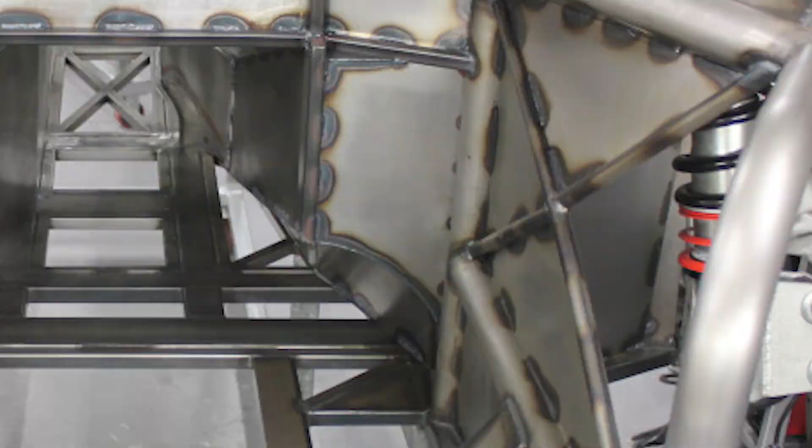Yo, on this episode of KPOPRC, we build the Zero Flux Hilux.

Oh man, it's legendary. I turned myself into a pickle, Morty!

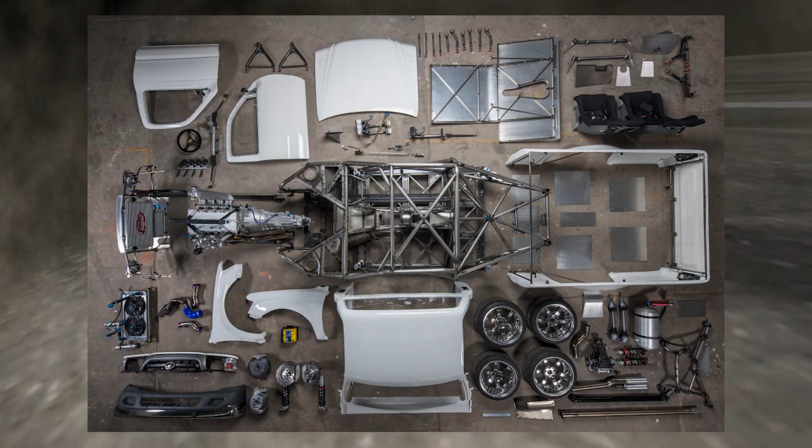And today, we're gonna kick it off with Engineered to Slide's Yota, the KPOPRC Zero Flux Hilux.

That's a knife. I see you've played knifey spoony before. What's going on? I'm just waiting for a mate.

Massive sources of inspiration don't usually come around often, so when they do, you drink as much of that inspiration as you can. One lowly afternoon, I stumbled upon Engineered to Slide. Hailing from Warrnambool, Australia, Nigel, the owner-operator of Engineered to Slide, creates his masterpieces.

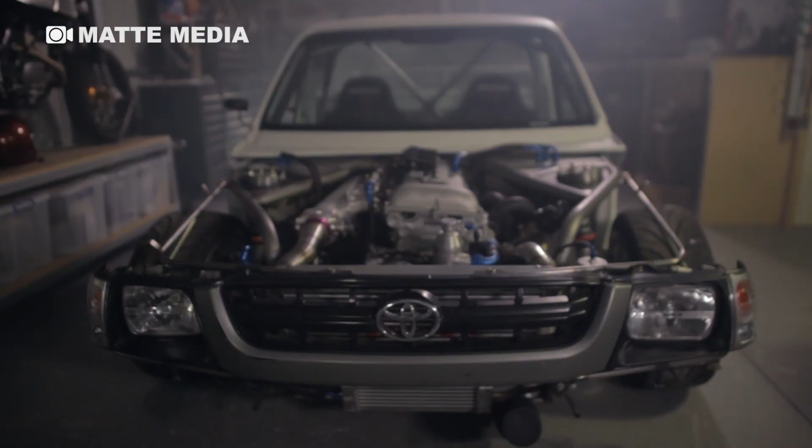The one that caught my eye was his fully tubed drift Hilux. Look at this beauty, I'm a huge sucker for tubed cage design. Look at this gantry of metal under the thin sheets of Hilux bodywork. Just look at it, just look at this beauty.

After going down a Google pit, I started to realize Nigel's manifesto is everything I aspire to be.

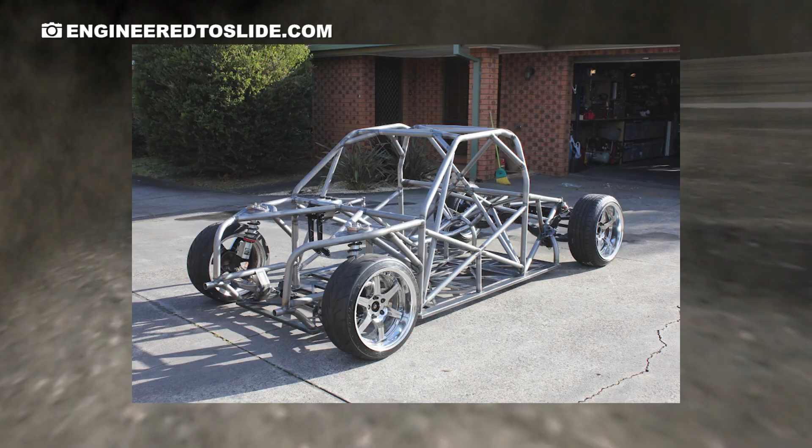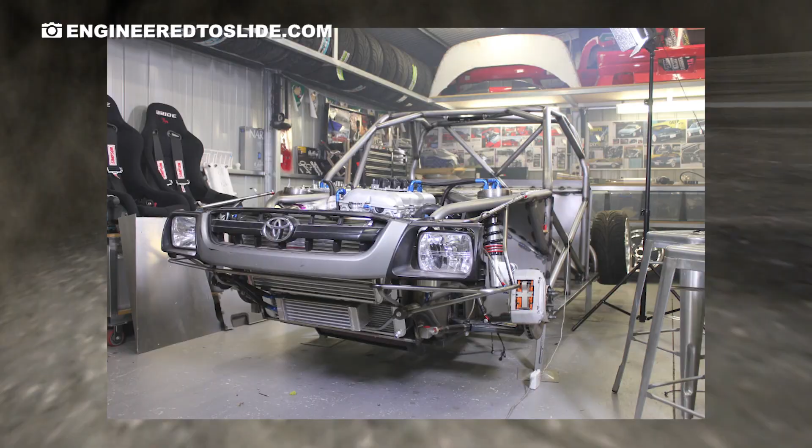100% ground-up tube chassis. Every component was meticulously over-engineered by Nigel. The beautiful cage was freehand designed with no plans. Every body panel removable, powder coated, clear coated, absolute labor of love. Of course, I had to have one.

I had to make one. Where do I begin?

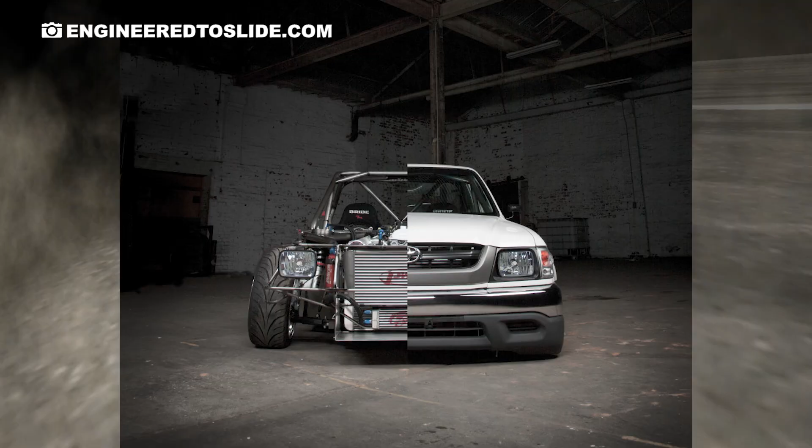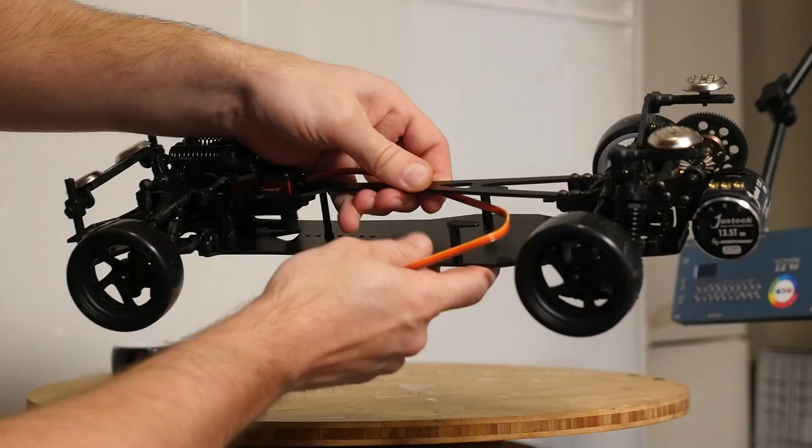The Sakura D5 is the obvious platform of choice when building experimental drift RCs. Why, you ask? Because it doesn't break the bank. A Sakura D5 chassis will run you just over $100, and now due to its popularity with RC drifters, most aftermarket companies are starting to pump out massive amounts of hop-up parts for it specifically.

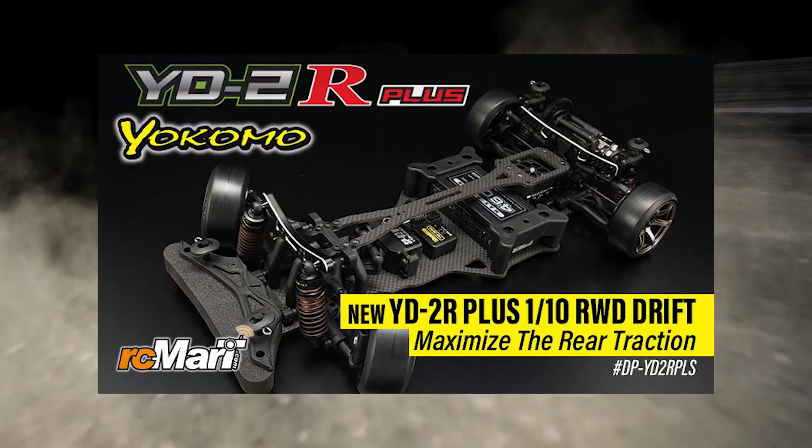Not to mention Sakura investing much more money into its first rear-wheel drive specific chassis. I bet they'll end up the way of the YD2 with more versions of the same chassis with subtle changes and baffling naming nomenclatures.

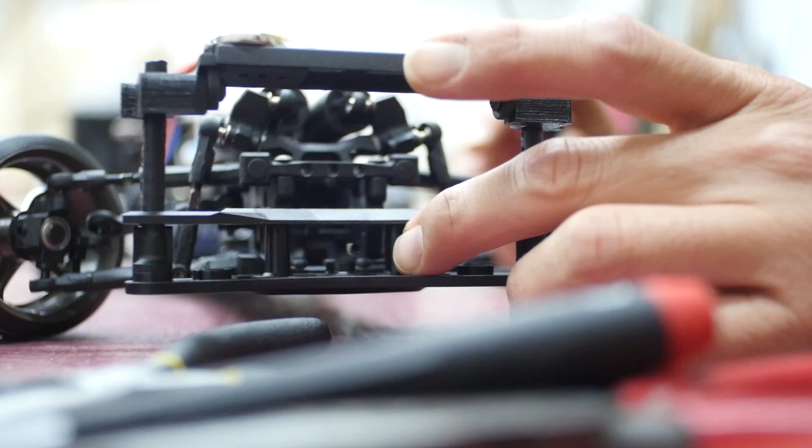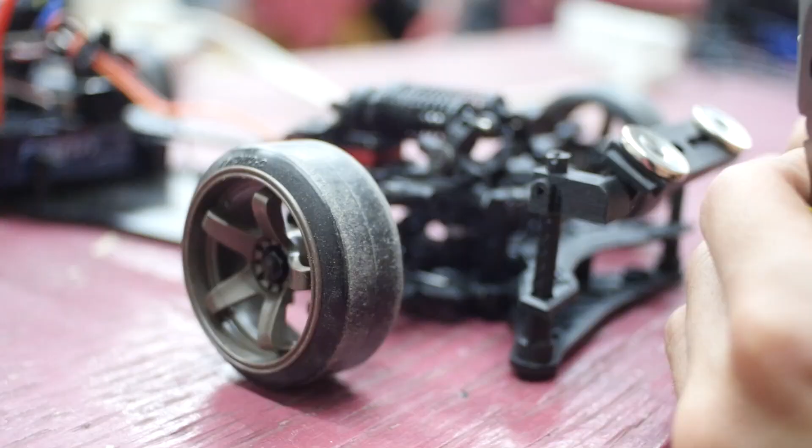Is it the best RC drift chassis? God no. But is it capable? Fuck yes it is, and with a group of experienced drifters at the track willing to help you test and tune your chassis, you'll get that D5 ripping and even tandeming with some of the most expensive RC drift chassis out there. But back to customization, you won't regret cutting a D5 chassis in half to make a wild project, because it only cost you $100.

So we got our chassis, that's the easy part. Now it's time to figure out how to KPOPRC the shit out of this build.

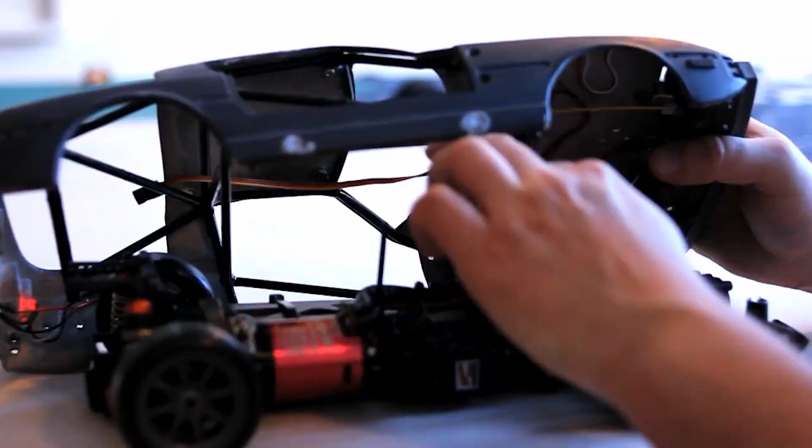I always like to build elaborate cages that attach to my chassis for all my builds. The first build, it was a copper cage on an old RX-7 toy I had as a kid for the Scale as Shit project. Then I evolved to the styrene with Adam LZ's cream color 240. It had winkable flip-up lights and a pretty sweet backfire kit.

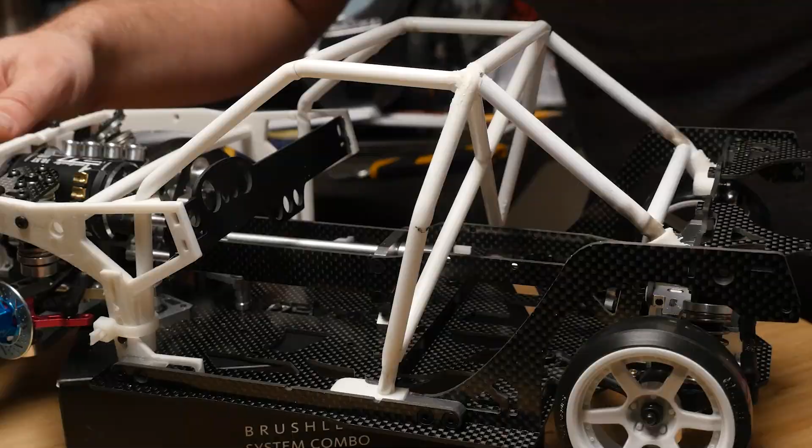Then I really went nuts, with the E30 wagon cage, with the KPOPRC bus, a network of wires allowing me to tap into any radio channel or light controller wire anywhere on the chassis.

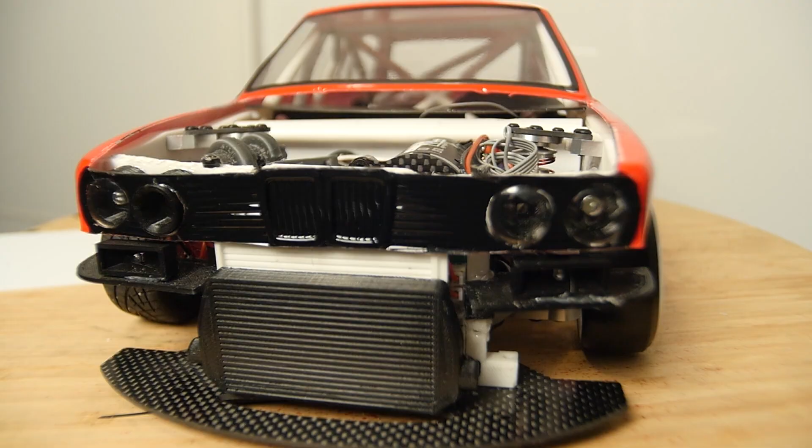The E30 is a slightly abandoned project because I did realize the Bulldog chassis is such a freaking dog. So now, what do? How do we make the Hilux build top them all?

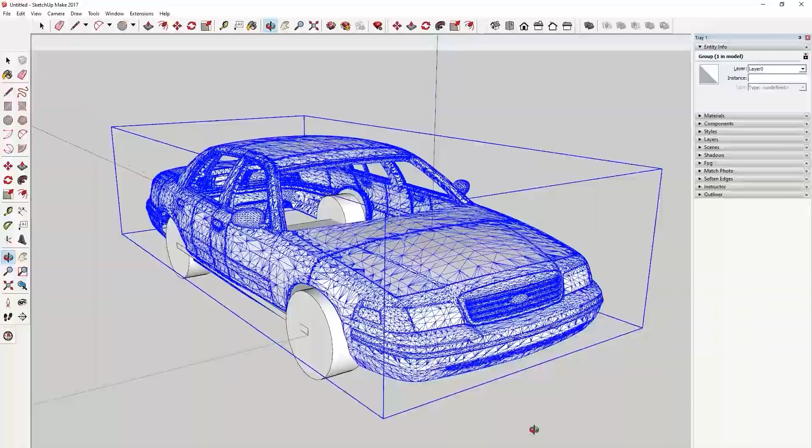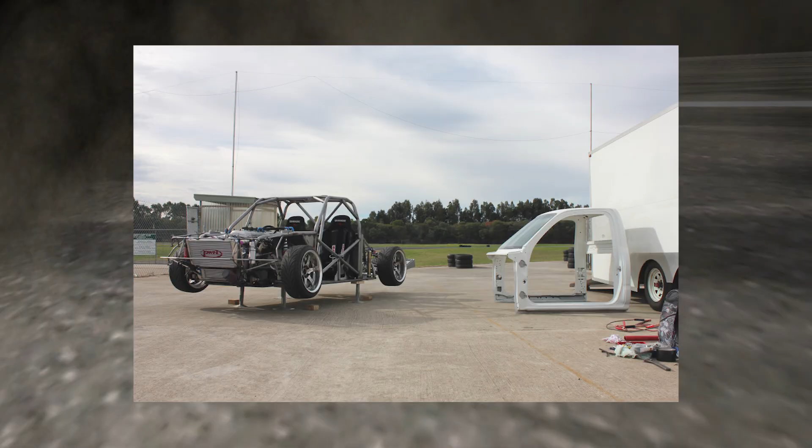How about we team up with another RC fabricator and share skills to make the ultimate 3D printable design for this chassis? Just gonna send it! Keeping within, of course, the spirit of the Engineered to Slide drift Hilux. Truly a Zero Flux Hilux.

Did you expect anything less? I can feel it all the way down in my plums. On your mark, get set. We're riding on the internet. The internet! A cesspool of misinformation and cute puppies!

Among the incredibly depressing drab and cuteness, sometimes you do stumble on some value in between those zeros and ones. That value is an amazing community of like-minded model makers who never really want to grow up. Those are my people. There are quite a few, and I'm very lucky to befriend the best of them.

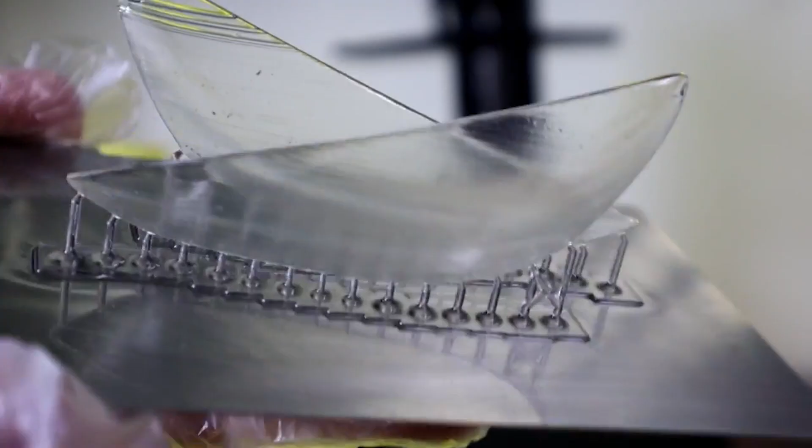One of those hobbyists is Ali from Scale Addiction. Who better than Scale Addiction to help model the Zero Flux Hilux? Scale Addiction, the master of 3D design, pumping out scale replicas of some of the coolest cars on his YouTube channel. We connected through the internet a while back, sharing photos of projects we were working on, and finally, now we are collaborating on this amazing project.

Oh, hold on, you're breaking out.

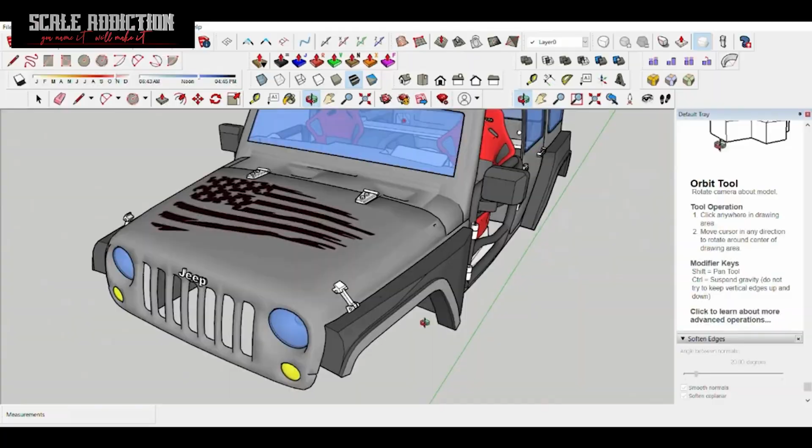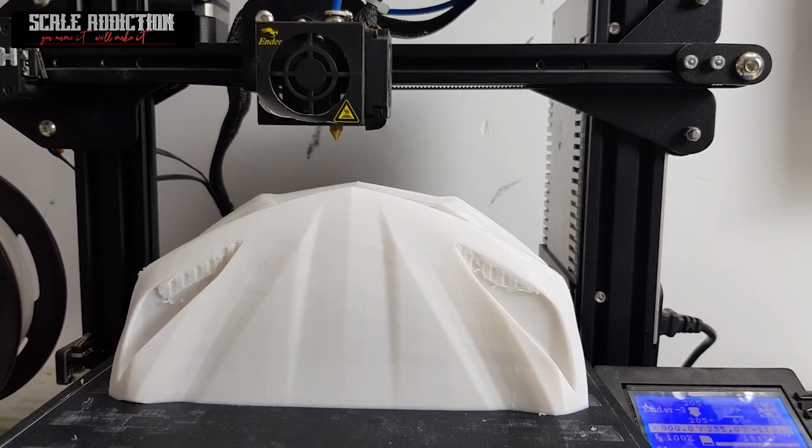I was gonna say it's so difficult to 3D model existing car bodies because car bodies have so many compound curves. They're not just like rectangular prisms. How long did it take you to become a master? I saw the R34, the new Jeep Rubicon that you did, and the Corvette C8 that you did, it's just amazing, beautiful, and everything looks so great. You've become kind of a legend of modeling these bodies.

It took me a lot of practicing, watching tutorials, and the company I'm working for right now, they saw some of my work. I've been designing simple stuff, so they told me, can you design the whole field for us? It's an oil company, and I was like, yeah, I can, but it's gonna take time. After that, I became good with designing, and I could draw what is in my mind.

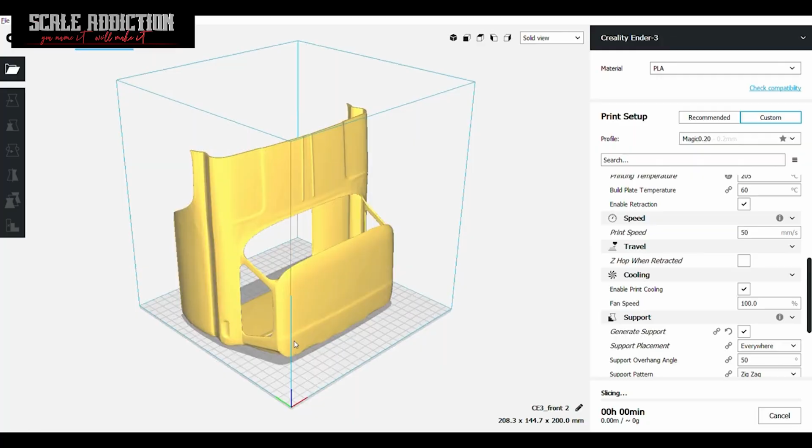I always say the best way to learn something is to have a problem to solve, right? And then you're working within the parameters of something. So you're not creating something from the top of your head, you're seeing something and then trying to translate that into a 3D design, and that helps you learn how to make the project, how to problem solve, which is super great.

So I assume that's why it was so easy for you to make all the tubing, eh? Yeah, that was easy. I'm kind of a master with the tubing.

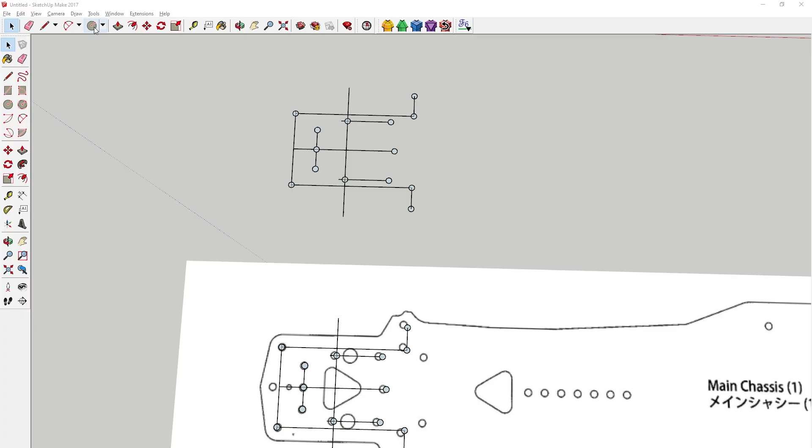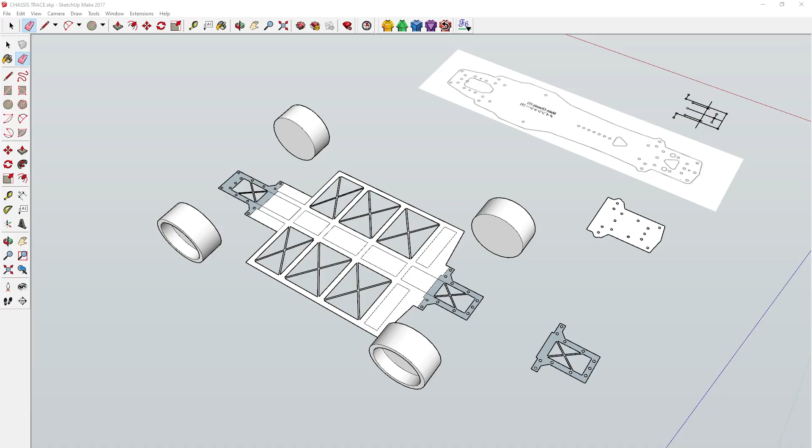Remember folks, measure 10 times, model 10 times, I think it goes. Or is it measure 15 times, model another 20 times? I guess either I have to get better at measuring or modeling, but let's be real, it's probably both. The original idea was to create a totally custom chassis, but after a ton of prototyping, I decided to make a piggyback chassis that sandwiches itself between the carbon chassis plate and the chassis components. Did I say chassis enough? Chassis.

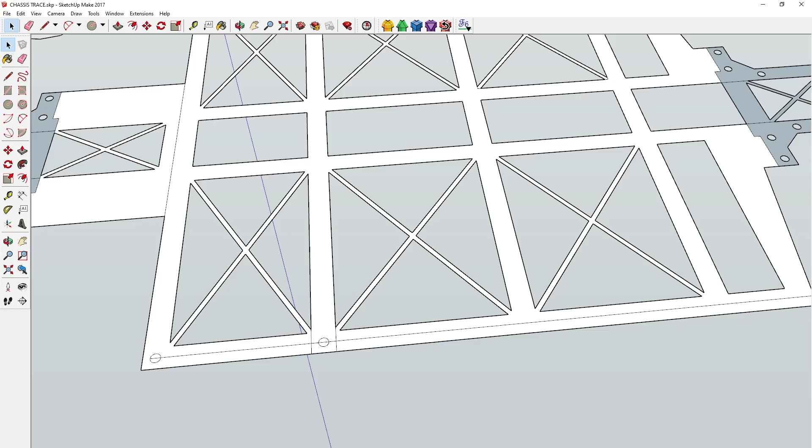Chassis. I don't even know if I'm saying it right anymore. This was the start of some serious iterative design. My absolute fave. Yeah, you know, it was, it's my fave.

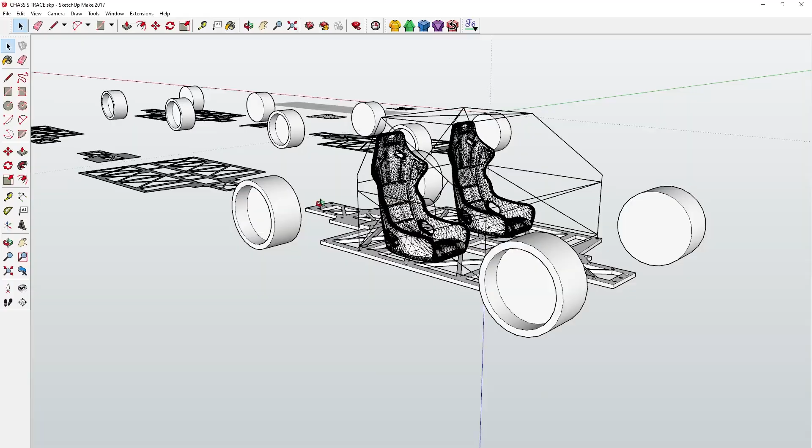It started out as a simple chassis, one that had to be printed in 2 sections. The printer bed was just not big enough to print the whole chassis. In the end, I did just decide to do a half chassis. This was the easiest way to go and allowed me to design mounting points for future cage mounting, that I would eventually send to Ali for him to get started on the elaborate Engineered to Slide tube chassis.

Oh shit, that thing is broken. It was almost a year ago, I would say about a year ago.

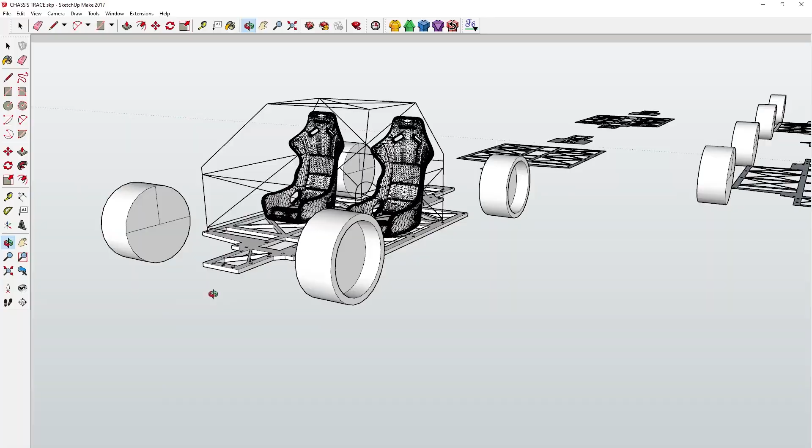We were talking about collaborating on a project, and I was like, I have this one idea. I'm super inspired by this company, Engineered to Slide, and I usually make my cages out of styrene, and it would have been cool to 3D print something. And I remember you saying, yeah, just send me whatever model and I'll tweak it. So I just made a crude, single line cage. I sent it to you, and you sent back this masterpiece cage.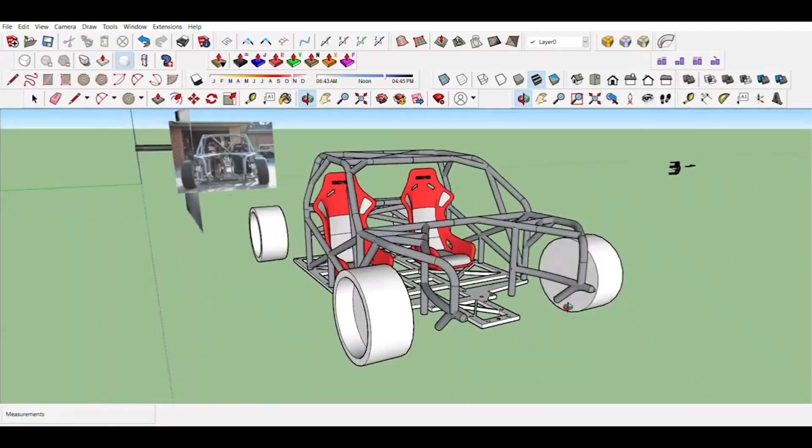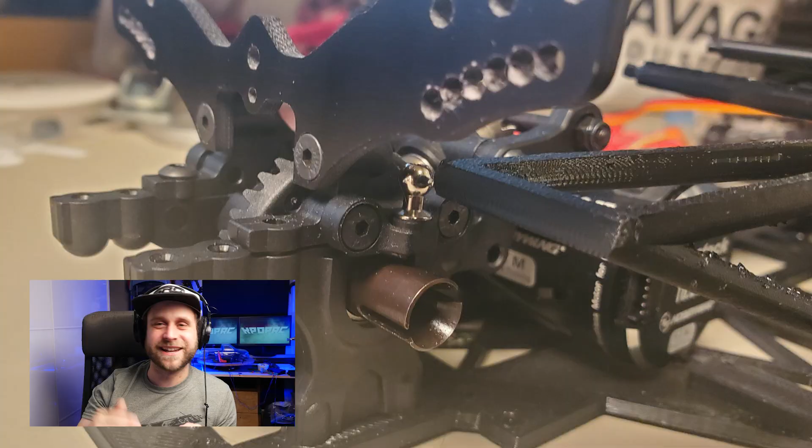You helped a lot with the chassis measuring. I used to send you things and you'd tell me, we have to make it larger, smaller. I felt so bad, man, because I was worried you were gonna get sick of me, because I kept messaging you on Facebook with all these messages, and then all the versions. I think we were on version 56 by the end of it. There's so many versions.

We finally did it, and it's one masterpiece STL file. Right now the problem is we can't sell it, because people are gonna steal it from us.

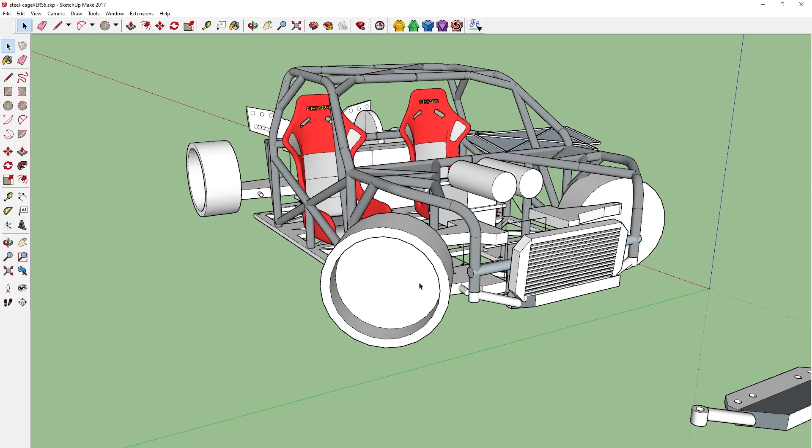I'm having fun sending it out to people, you know, it's fun to print it and send it to people, and that way there's a limited amount and only certain people have it, and it slowly trickles through. Like a super fan. Yeah, totally, super fans that get it, and then nobody else, and it becomes this exclusive thing that nobody has. It's like a legend, like the whispers of a legend, you know? I don't know, it seems cool that way.

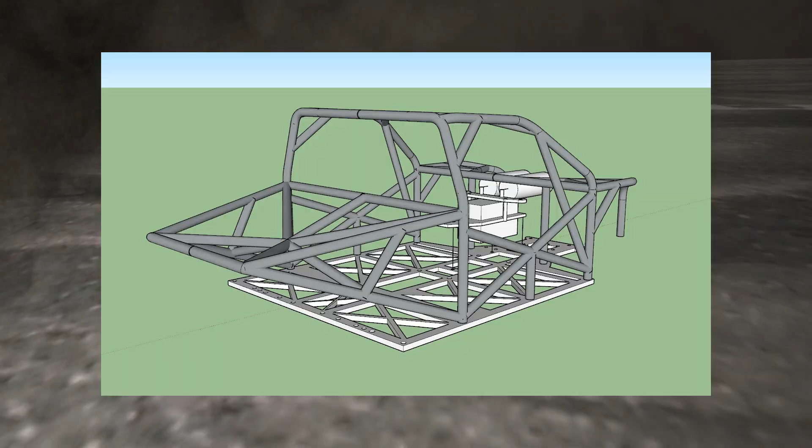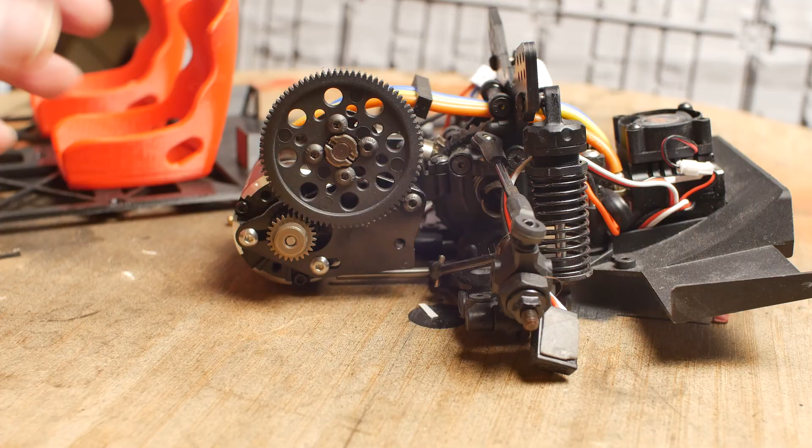There were a few logistical issues with the D5 chassis. The battery location wouldn't make for a scale-as-shit look, so it was either we plopped it on the back behind the rear wheels, or tucked it standing on its side behind the rear bucket seats. I do want to run this truck naked, no body, and really show off the cage scaleness. So of course I rotated the motor and driveline 180 degrees and incorporated a slick battery hold-down, 3D printed into the chassis. The bullet connector actually holds the battery in place.

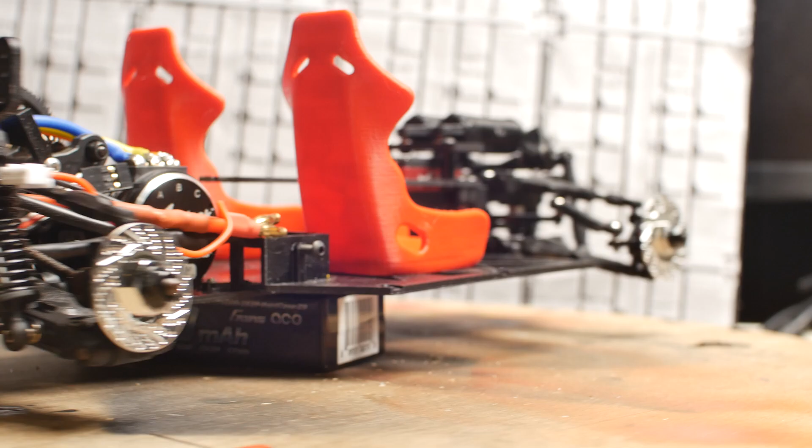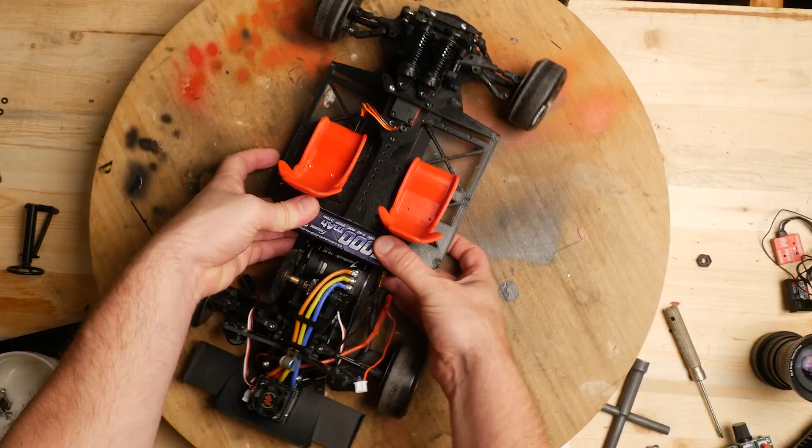A few minor modifications I had to make was not only flipping the transmission around to mid-engine the D5, but also trimming the upper deck chassis plate to fit the horizontal battery. But don't worry dudes, the cage is quite a rigid member, and it stiffens it up as rigid as it would be stock.

The servo is a cheapo purchase from HobbyKing, a Trackstar TSD99X. I've had no issues with the servo on a few drift cars. I'm sure there are better ones, but if you run a money-hemorrhaging YouTube channel and are on a budget, maybe this is the way to go.

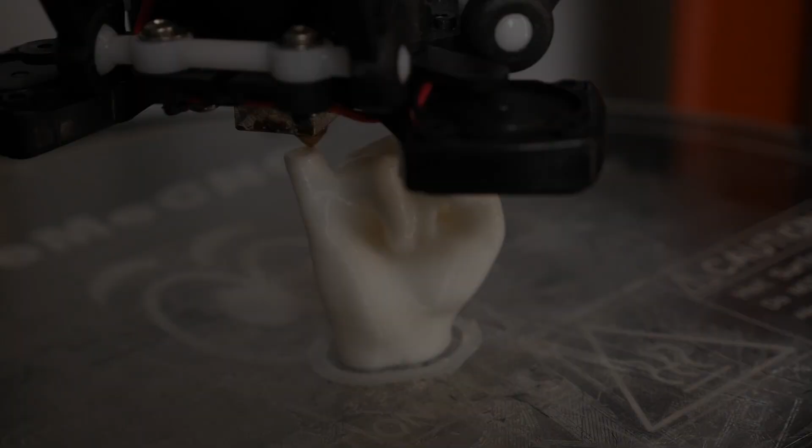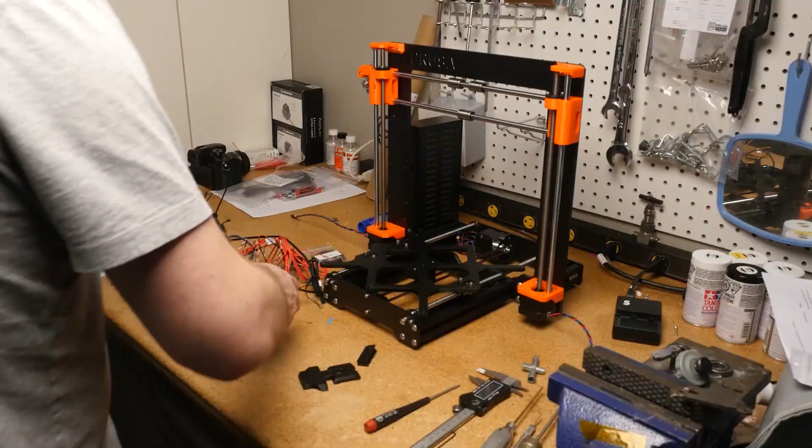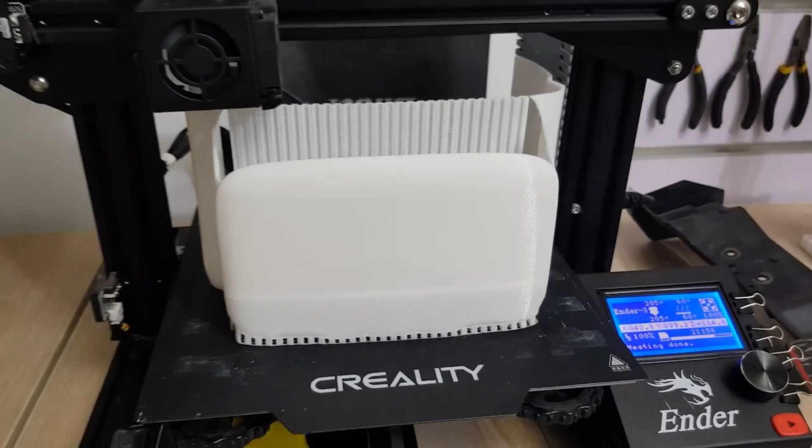I've said it once and I'll say it again: if you're into RC hobby, model trains, gunpla, or whatever flavor of awesome, do yourself a favor and get a 3D printer. Whether it's an FDM printer or a resin printer, they've come down in price so much that one can be had for under $250. Right now I'm using a Creality Ender 3 I got in 2018, and I still have it. I did some upgrades like a hot end, extruder, and build plate, but it's working really good. I got a resin printer as well.

How's the resin printer going? It's not easy to work with, and I still get a lot of failed prints. It's not like an FDM printer, but when they finish printing, it's really good, very smooth, like 0.05 millimeter layer height. I still use it for the headlight and tail light, and you've seen the videos, it looks crystal clear.

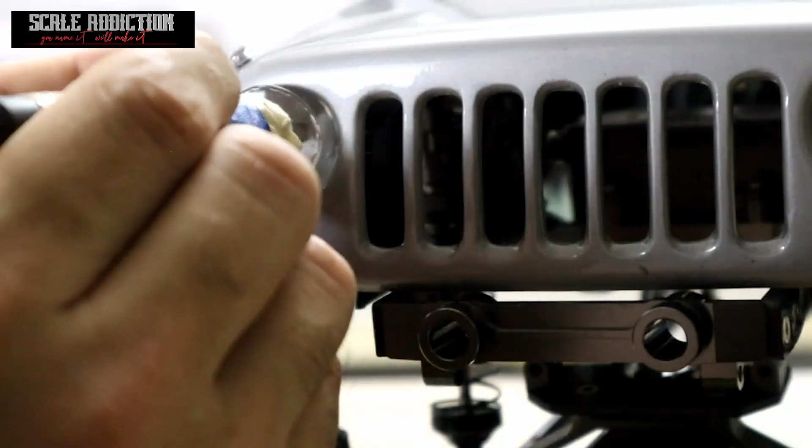Yeah, it's amazing. Like we were talking, it's always a problem getting the lensing on the lights to look proper, but with a resin printer and some polishing, you can make it look so good. Some people don't believe it, they say it's a scam or think I'm an advertiser for the company. I tell them, hey man, this is my channel, look, this is how I did it, and I'm not sponsored by anyone.

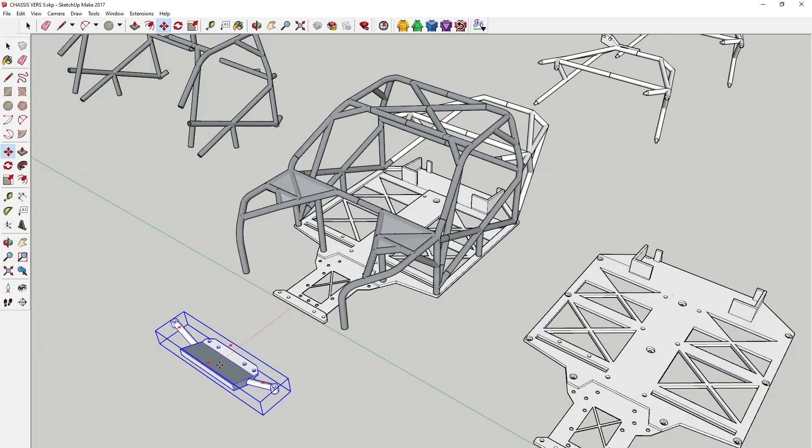Ah, iterative design, how I love you and hate you at the same time. The goal of this episode is to have a working prototype, everything fitting correctly, get the Zero Flux Hilux drifting, then over time refine the prints. I can already see the comments about print quality—dudes, this is printed at draft. It takes too long to print high quality just to find out things don't fit.

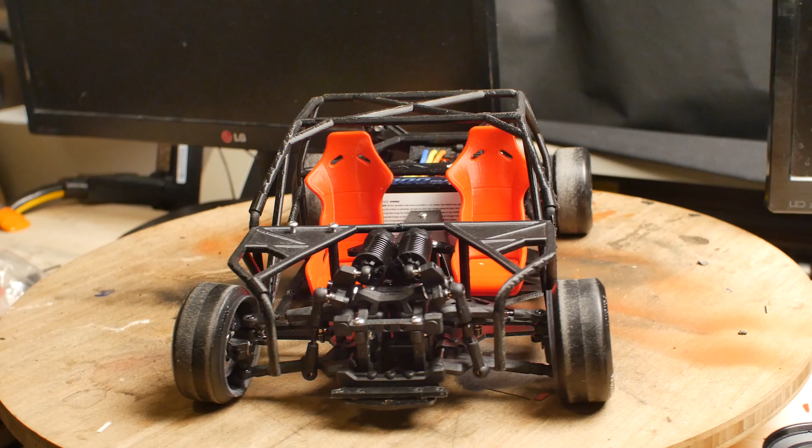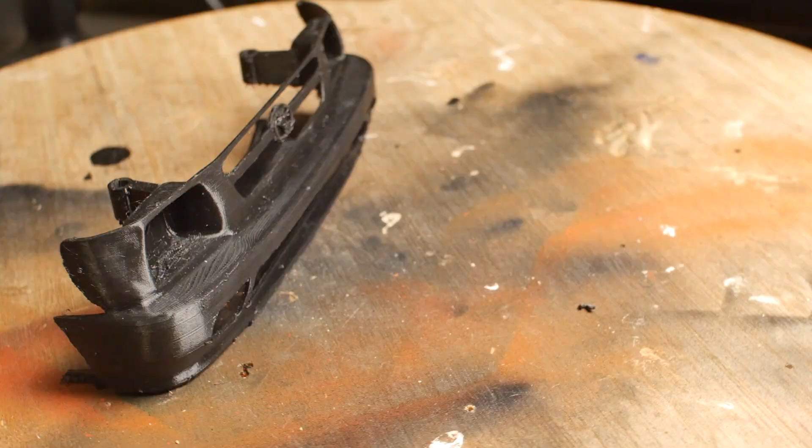What's left? Well, the Hilux front bumper, that's what. Ali killed it again with this one—it's not an easy thing to model, and he nailed it. After he sent it over to me, I had it printing within minutes, and it came out freaking amazing. All that's left is to print it in resin or spend hours sanding it to get the FDM texture out of those beautiful body lines. But that's for another episode. Let's get this thing together and see if she drifts.

Also, a big shout out goes to Gear Guy, another amazing contributor to our RC community. He designed up the actual rims and resin printed them up for me and sent them over. This thing is really coming together. There's nothing like seeing something you've been pouring your blood, sweat, and tears into actually coming to fruition.

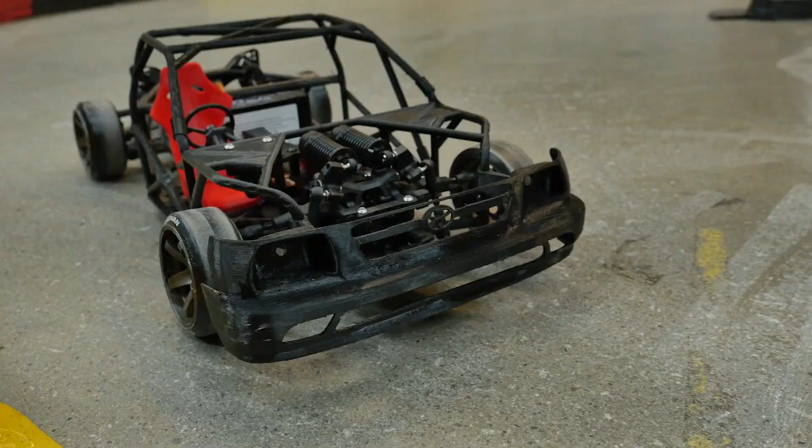What we do here, just go back.